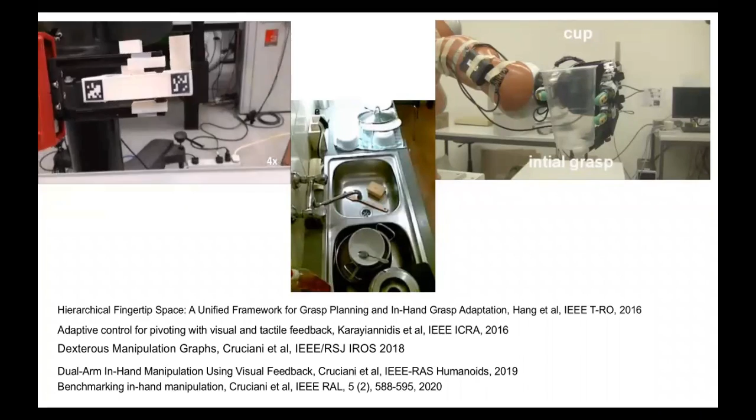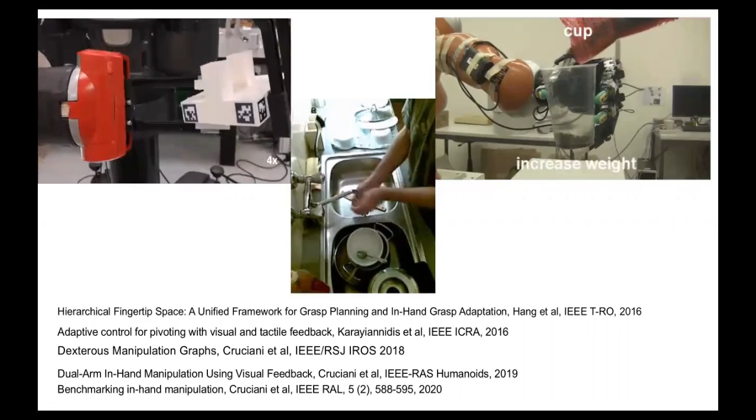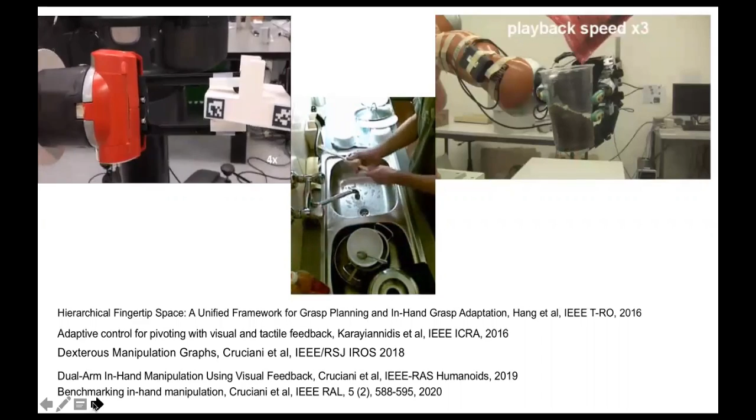And despite the fact that we do this almost without any mental thinking, many of these tasks are still impossible to demonstrate with contemporary robotic systems. Now, our work has covered problems such as in-hand manipulation using dual arm planning, and also in-hand grasp adaptation, where we devised various types of control algorithms that can adapt to the change in object attributes, such as, for example, weight, but also compensate for external disturbances, such as in this particular case, external forces.

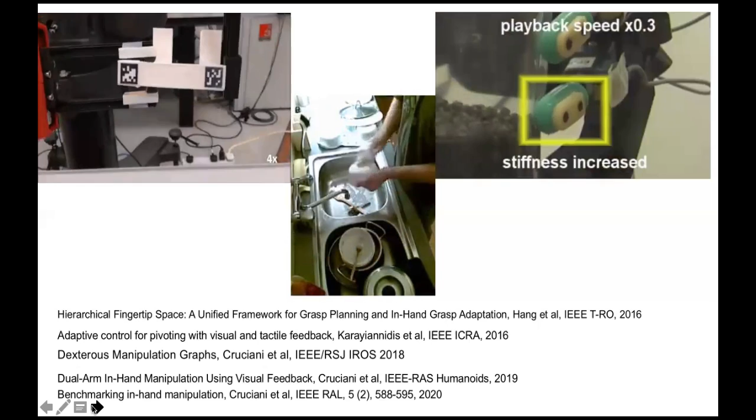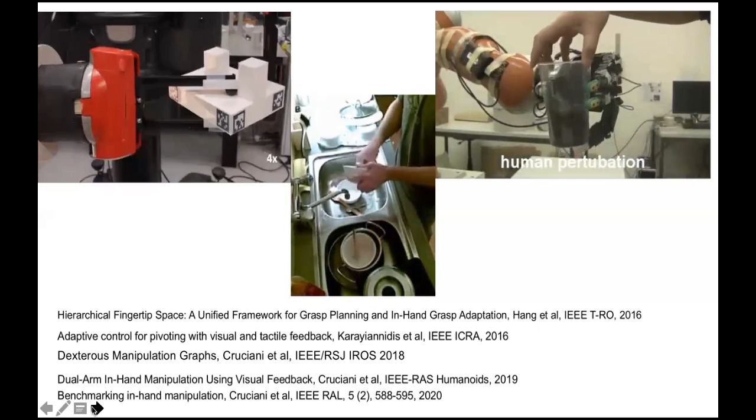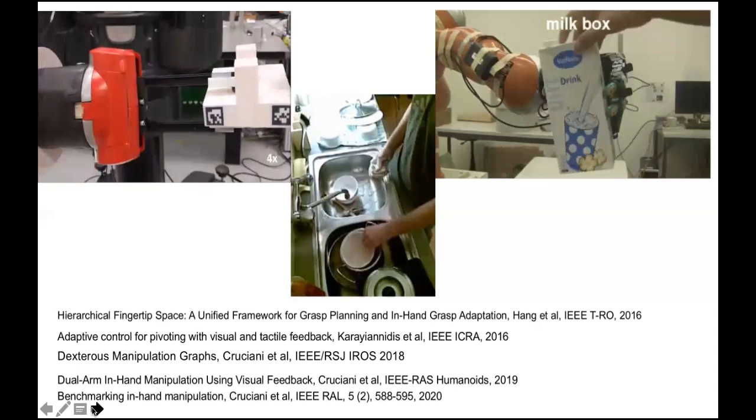And what still remains, I think, a big challenge in the area of robotics is shown in the movie in the middle, which shows how skillful humans really are in interaction with objects. And again, in various types of media, when friction coefficients also change, but also the ability of our hands to adapt to the material and also use both hands, of course, as a tool, but also manipulate other tools at the same time as manipulating objects and so on.

Grasping, although studied for quite some time in the area of robotics, is really only a small part, I would say, of a grasping sequence, which has to do really with understanding scenes and understanding how to actually generate a planned grasp in the presence of obstacles, how to perform grasping, both in terms of doing, for example, motion planning, but also task planning, so how to grasp an object for the purpose of being able to use it for the task. And also then, while holding the object, perform some form of adaptation when we have, for example, external forces acting on the object, or for the purpose of actually placing it somewhere in the environment.

Now, most of the work that we are looking into today focuses on contact-rich tasks. And the difference between contact-free and contact-rich tasks, of course, is that contact-rich tasks require some form of exchange of forces and energy that require dynamic planning, and together with trajectory planning, they also need feedback control, which in most cases needs to be a combination of data-driven methods and analytical approaches. We also need to be able to rely on real-time multimodal perception and control, and we also need to be able to take into account complex physical properties, which in most cases will not be uniform when we interact with items such as, for example, food.

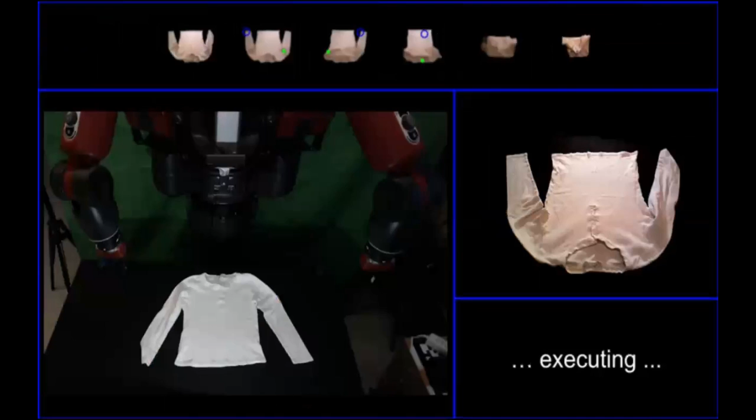Again, this work is being presented by Michael at IROS, and I just give you an example here of how the system performs. In this particular case, we use a Baxter robot to execute the action. So we have a starting state, and in the upper part of the video, you actually see the plan of, in blue, which point should be grasped, and in green, where it should be put, which is represented by what we call the successor state, given the initial state.

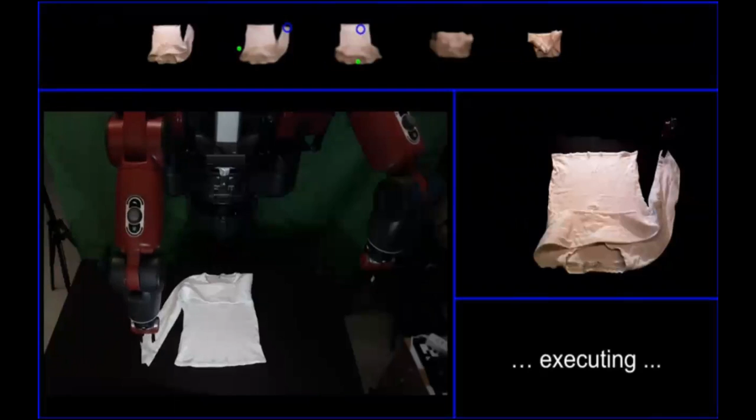And as it can also be seen here, we do this by using dual arm manipulation, because it's much easier to do it with two arms in order to also make the workspace of the robot larger than it would be if only one arm is used. Again, the citation is on the bottom of the previous slide, so please attend and listen to the presentation during this conference.

What we also thought was an important problem regarding cloth manipulation and folding was to build a benchmark where we considered three different tasks. It's published in Robotics and Automation Letters earlier this year. And the three particular tasks that we look at are unfolding a tablecloth or spreading it over the table, folding a towel, and also fitting the neck of a t-shirt on a mannequin head, which would be kind of like an initial task of potentially dressing a human.

Another work of relevance for this particular workshop that I would like to say a few words about is learning robotic interaction tasks with stability guarantees, together with Shahbaz, Pietro, and Hang. Now, the motivation for this work stems back to rather classical peg-in-hole tasks, but also tasks that require modeling of pretty complex dynamics, where the dynamics change abruptly while the task is being performed. And where recently reinforcement learning has been proposed as a relevant model to encode contact-rich tasks.

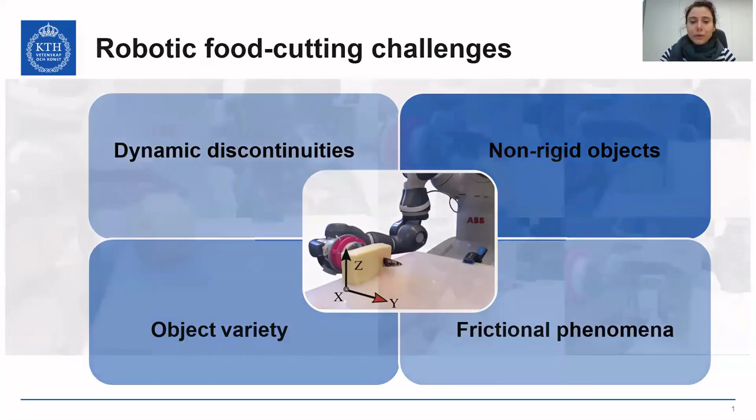There is a lot of friction, which is notoriously nonlinear, and most of the objects that we use are non-rigid. So a lot of assumptions that we could have made about the interaction dynamics are now immediately violated. The approach we have decided to take in RPL is a data-driven model-based approach. And obviously that means that the first thing that we need to do is to get enough data to fit the model.

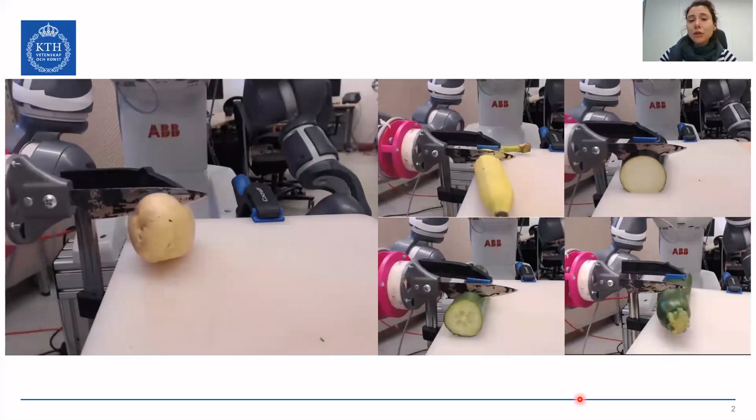Now, as is the case in most tasks that involve deformable objects, simulating the interaction is really difficult, and the simulations that are available are not useful enough for us to learn an accurate model of the dynamics. So consequently, that means that everything we do starts and ends with a robot.

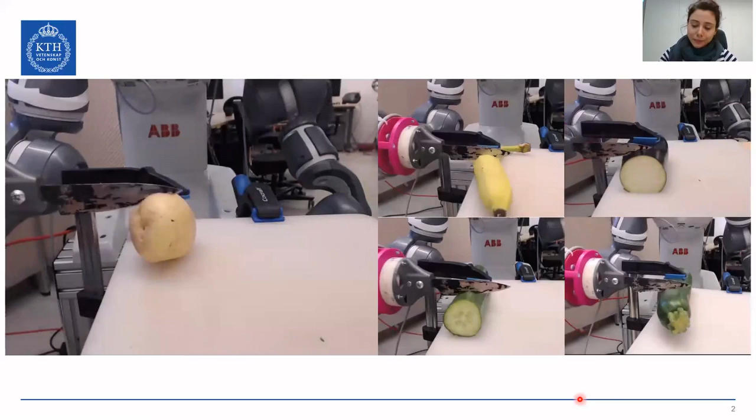Now, unfortunately, that also means that everything we measure and everything we want to use is constrained by our hardware. Different robots, different sensors, different control laws to gather the data will result in a different model for the same task. And as an example of this, I would like to show you what a latent space that we're trying to learn looks like when we just change one assumption about the control input.

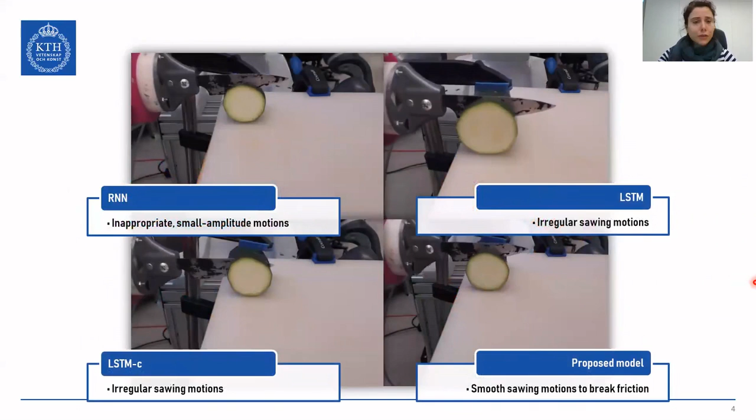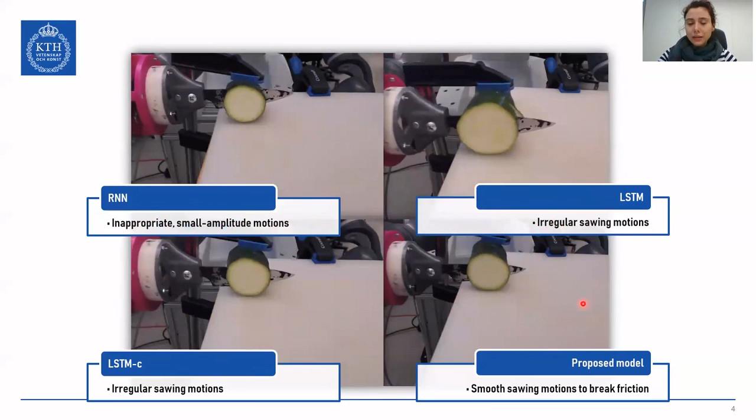We showed that learning on that nice latent space and using some specific training techniques, we can get a model that outperforms baselines. But what was most important, the conclusion that we reached from this work was that it is absolutely possible in a contact-rich task that we will have similar models when you compare them based on the learning curves that have completely different behaviors when you plug them in online.

And that was a big mystery, because when you're just comparing the learning curves and everybody has approximately the same training and validation scores, and then some of them, when they act as a model for the controller, lead the controller to unstable behaviors, it gets a little bit dangerous.

So then our basic idea was that since interpretability of deep networks is something that is very useful nowadays, we would like to use interpretability to explain our predictions. Now, unfortunately, when we say interpretability it usually means images, because that is how the human brain works. Things are obvious to us and we understand something when we can visualize it.

But the problem is that the interaction dynamics are inherently not images. They are velocities, they are forces. Those are not in an image format. So that means that we need to build images.

And after a bit of deliberation on what are the characteristics of an image that we need to preserve, we concluded that the important parts are that it is two-dimensional, that it's compact, that it is visually intuitive to whomever is looking at it, and that it represents the state of the system at that particular point well enough so we can learn from it. And we achieved all of those points by introducing what we call the Kinodynamic Images, which are basically sequences of measurements that we take during a task execution and then transform them into a two-dimensional, compact, intuitive, and useful presentation to learn from.